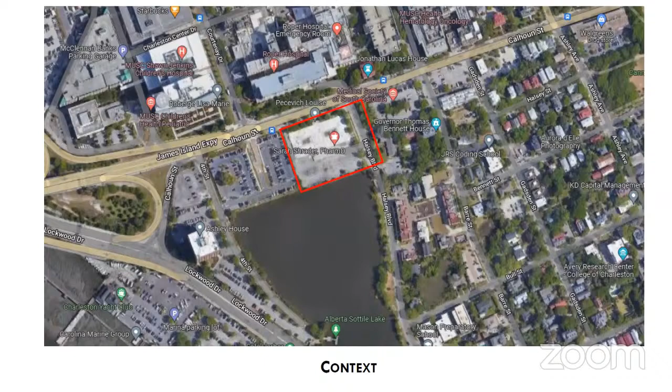Thank you, Mr. Chair. So 295 Calhoun Street is requesting conceptual approval for new construction of a mixed-use development and requesting one additional story based on architectural merit and context. The Harleston Village neighborhood is in the Heights District 7 and the Old City District. Here are context slides for you; this site is between Alberta Sottile Lake and Calhoun Street.

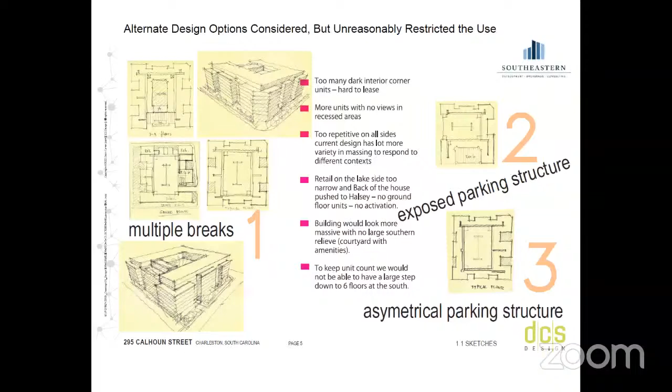So let's look at the building. It's roughly the same in terms of the basic massing. What can we do with it? How can we bring the scale down? Most of the time, when we look at Calhoun, you have Roper Hospital, a children's hospital, and they have much taller, bigger buildings. There's no real reason to bring this building down.

But we did feel that from Harleston Village and from the south side, the building needed to do something. We felt that if we created steps in the building, it would do two things: bring the scale down on the south side, and also break up the long facades along east and west, toward the houses and the park we're creating. So we immediately felt it was the right response.

There was one thing we did — we massed out about 20,000 square feet of the best units this building had, by far the best units you could have, with southern orientation and the best views. I showed it to my client, and there was hesitation, but after a while I said, this makes a big difference, usually, but let's do it. I gave the number for the loss, and we said, let's do it.

Then we said, okay, since the building is asking for an extra floor, can we do something about it? We heard from staff again, asking what if you step the building back 8 feet along the east, west, and north. So we started playing with our model again, and when you look at the building at ground level — which I'll show you later — you really can't see it from these views.

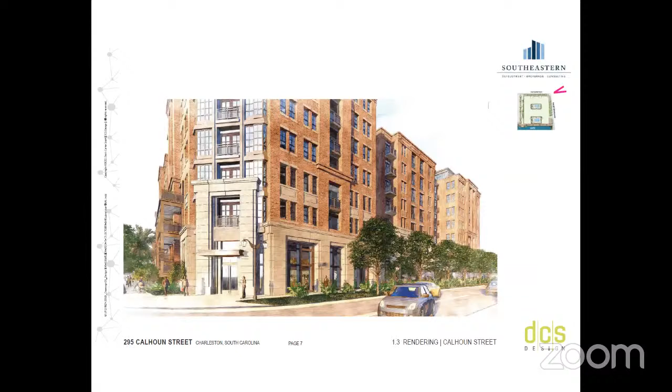So I think these were the main changes, and here's another one we'll show in the next slide. What we did on Calhoun Street, there was another panel at these meetings asking: can we read the building as three buildings, three facades on Calhoun Street? Can we create deeper recesses and start to read the building like three buildings rather than one long facade? So that's what we did.

We did not eliminate units completely, but we eliminated half the size to create these two areas, cutting about 20 to 25 feet deep into the building. So it really starts reading like three separate facades.

And from this view, you start to see this as a 7-story building. You see a little bit of the 8th floor, but that's it. This really starts to feel like a much shorter building. And because it's done in concrete, this building doesn't have to be as tall, since the floor heights are less when you do a concrete building, as we mentioned last time.

We want to build a really good quality concrete building that lasts a long time. We didn't want to do wood frame, and we can go much faster.

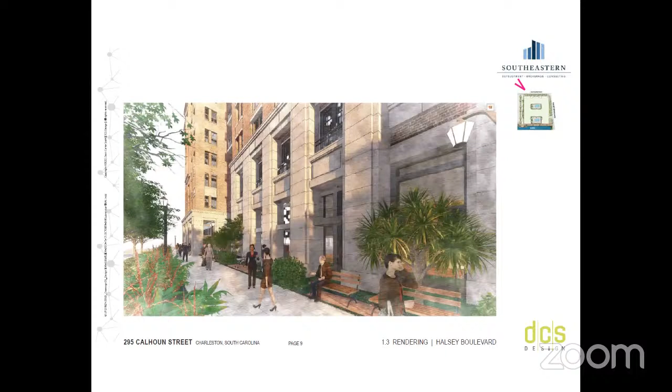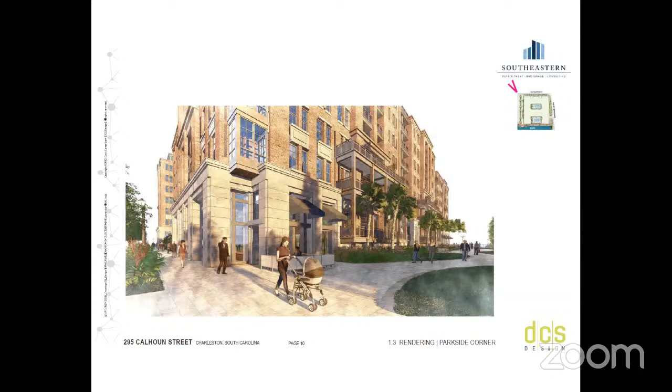This is going through the building, and again we repeat basically the same articulation, some elements with the balconies on the side of the park. Again, reading it, it's really a 7-story building, because the 8th floor is set back so far.

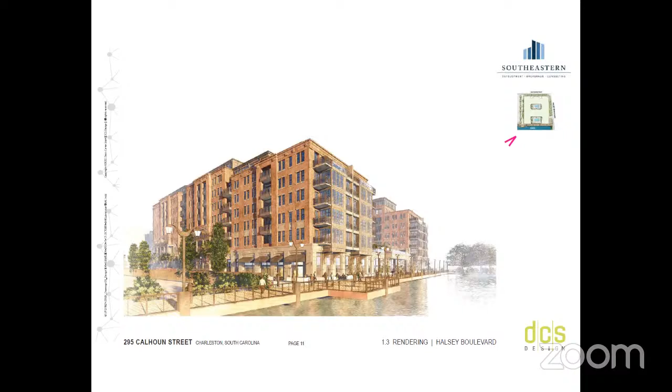Now you start to see the effect of the stepping of this building. If you look at it, it starts with a volume that's just 5 stories here, then about 10 feet back it goes to 6 floors, further back it goes to 8 floors. You see how much volume was taken off the building and how much it reduced the scale a little.

But it's also starting to read as separate volumes here, and I think that was the real goal - because everybody liked what was happening in the south with the deep recess, deep courtyard, repeated in some form on the north side, though not at the same scale, and then doing something really distinct with the east and west facades. I thought it was pretty successful.

These are just some other views, so you can see again the scale and stepping of the building. These are repeated views a little bit. One more, please.

This is the same, starting at the sidewalk on the Halsey side, on the other side from what you'd see on the building. You really can't see the 8th floor. There's a little bit of stepping, going from 5 to 6, then to 8 here, but really it reads as 7 visually because the 8th floor is so far back.

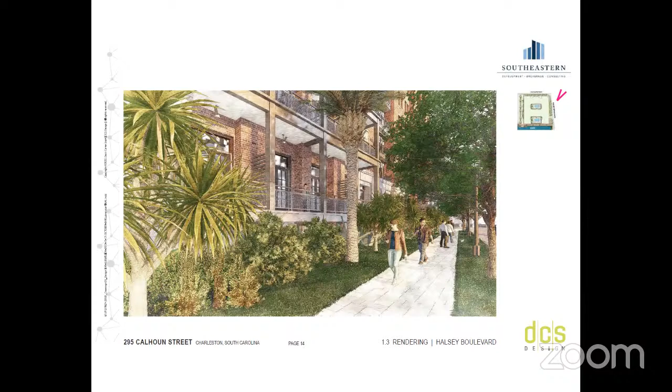This is just to show that we wanted to address each side of this building in a different way. Halsey is really a residential street, so when you're walking by these 3-story balconies, now broken up, there's no long elevation - they really create this feel of a 3-story volume that you walk by, which is almost the height of the townhouse.

So when you feel that, the nice thing is the activation, because you can have people sitting here having a coffee, say hello, and it just feels safer that way. So that's why it was so important for us to maintain these units and home activation on this floor. These are just really important to give you a feel.

And I would like to finish my presentation. Thank you.

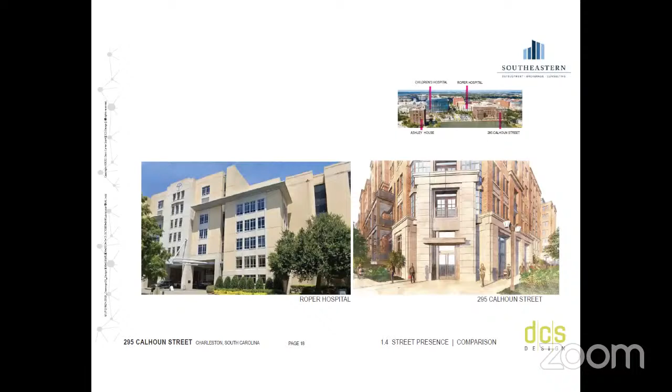Mr. Chairman, before we do that, can we go back? I have a couple of questions for Mr. Menders. Of course, that's entirely appropriate, questions of the applicant. Yes, okay.

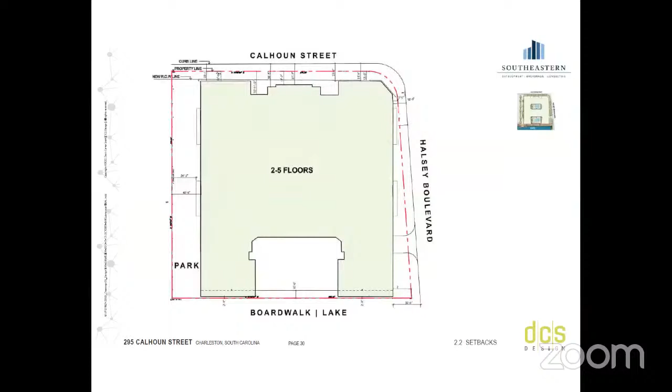Lawrence, if you go to page 33. So I wanted to just confirm with you: the first floor setback is 10 feet on the south side. Yes.

Immediately, the living floors immediately above, it looks like it's about 2 feet. Is that right? There's an overhang of those immediate floors. The overhang is roughly, it's about probably 17 to 18 feet. So let me just look at that with you. Sure. So I've just had knee surgery. That's okay, yeah, we can have that screen. This overhang is about 17 to 18 feet. So this is the top. Yeah, that's correct. I thought you meant height.

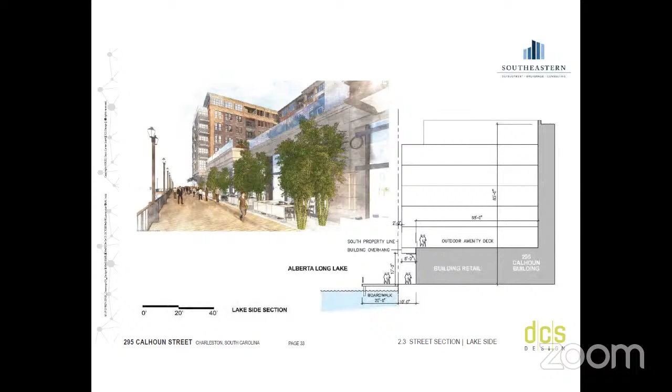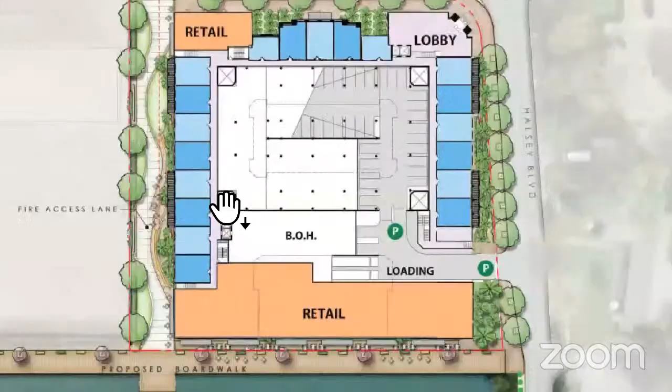Lawrence, page 29. Just looking for confirmation on this: is this west alley, on page 30 it's called a park, on 29 it's called the fire truck vehicle access? So the west alley, well, it is a park, but it will be designed as a park. It's going to have the paving and the green area, but in case of fire, it can be a small section of it, about 120 feet into the bound, that can potentially be accessed. We don't know yet whether we need that, it was not finalized, but it can potentially be used. It will be designed as a green space with benches or something that would protect it from the fire truck going in, but you would never tell that it's a fire access. Right, I was just interested in that. Yeah, it was called out as two. Yeah, it's still not certain whether we actually need it because this is now a high-rise concrete building and doesn't need that much access because of how it's designed. All the fire protection is inside the building compared to a low-rise building. Because this is a high-rise building, I don't think we would need that, but we did put it in just in case. Thank you.

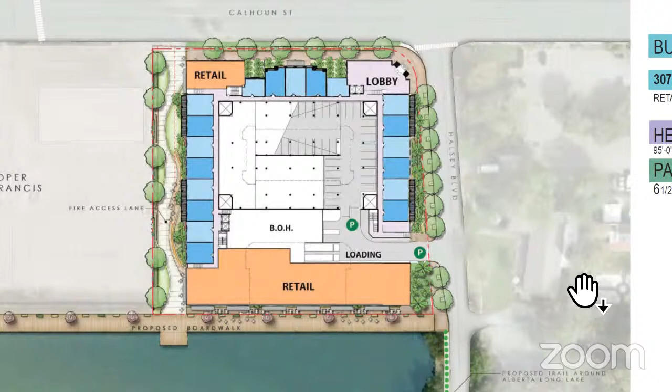And just a question in general: the HVAC equipment, I don't anticipate that it'd be drawn now, but do you anticipate that it would be on the roof? Yes. Do you anticipate that it would be visible if we were to look at some of the elevations? We did have an exhibit with a roof plan of the building. We set it back about 20 feet away from the edge of the building, and it depends what kind of equipment. Usually these units are between 4 to 5 feet tall, but we haven't finalized the mechanical system. You expect it to be about 4 to 5 feet with some screen walls, and potentially some overruns for elevators and things which are also tall. But there would be setbacks significantly, like probably 4 to 1 or 5 to 1 from the edge of the building, so there's no way to see them unless you are 500 feet away. Thank you.

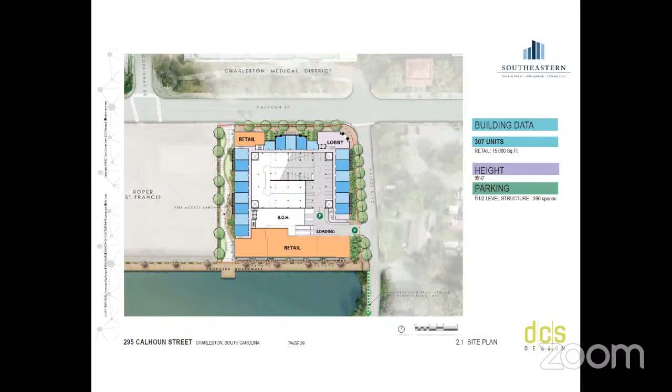Ms. Wheeler: Yes, I have some questions as well. If you could go to page 13. I studied the floor plans and the perspectives, and there seems to be some disconnect, so I want to get some clarification.

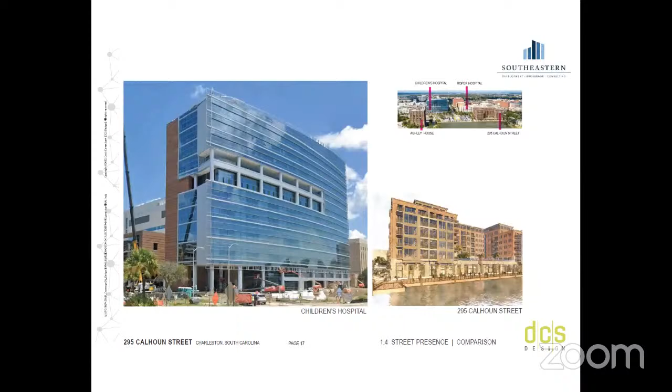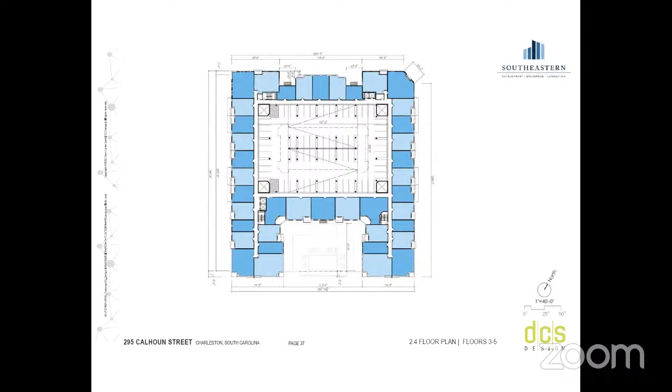Okay, then I found another disconnect, which is concerning the eighth floor recess. So if you go to page 11, 12 - and I know you studied the recess based on staff comments extensively - I'm looking at this 8th floor recess here, right?

This is the 8th floor. Can't see it from this perspective here very much, but I can see it here, and this is kind of in line with the balcony here. Yeah, so it's a significant setback. Oh yeah, it is, but probably about 30 feet - significant, but it is a setback from the 6th story.

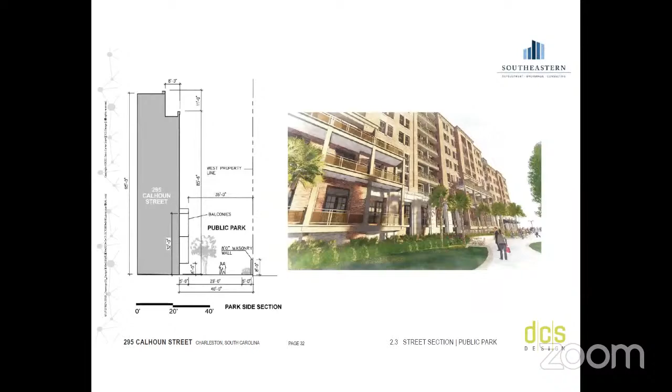But then when you go to the floor plan, which is again page 39, that 8th floor is much further pushed out, so it looks like it's 13 or 14 feet further pushed out from what I measured from the drawings. So this one here is not aligned with the balcony that was on the floor below.

Oh, so which then - this is pretty far set back. It's not what the rendering shows, though. Well, it's within a foot or two probably. I mean, it's not more than that.

So have you developed the floor plan separately from the rendering? Yeah, these are right now conceptual floor plans. We did not - this is not like a model that is 100% connected. I think that model more or less matches exactly what's shown in this plan. And if it doesn't, we can happily follow the 3D model. But I think those are pretty much a very close match to each other.

Yeah, I don't think it does, but I'm just confused - which drawings should we look at when we review this, or when we judge this presentation? Should we look at the renderings or the floor plans? We actually have also submitted the floor plans that have the exact dimensions. Yeah, I have them here in front of me, and again, it doesn't align with the renderings.

And the renderings are what we look at to judge the massing mostly. Yeah, the renderings are pretty accurate. I mean, these are not 100% exact models - these are conceptual models, but they are within a foot or two of all of them. Except I agree that probably the balcony in one floor was showing slightly less than on the other. I agree with that.

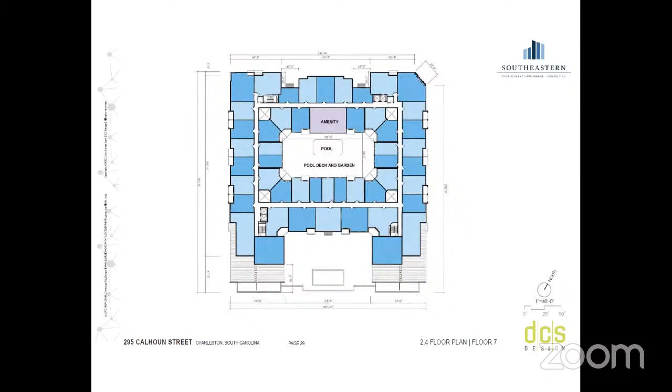But thank you. Any further questions from the board before we move to city staff comments or recommendations? I'm going to make an observation.

While there are some similarities in materials and perhaps even in the general perception of overall massing, staff has worked extensively with the applicant to adjust materials and modulate the massing to an 8-story form along Calhoun Street, transitioning down to 6-story massing and lower forms along Alberta Sottile Lake and the edge across the village, while additionally breaking up the massing vertically with hyphens and other design elements. While still a large building, which is not inappropriate to the context of the medical district, its massing has been adjusted with treatment vertically and horizontally.

We have three comments. Number one, at the east and west elevations, reduce the length of the units closer to the exterior at the 7th floor at the south, which have been extended. The length of these as proposed weakens the transition and diminishes the articulation as a step between the 6 and 8-story portions. This is evident on page 13, if needed for reference.

Two, as the massing on Calhoun Street, with the exception of the chamfered corner, is symmetrical, consider adjusting the eastern third of the Calhoun facade so as to make the openings mirror the western third. The chamfered corner should be what breaks the symmetry instead of a change in the pattern. And three, continue study of the top of the 7th floor at the chamfered corner, because this is the entry to the lobby of the building, and it is the element that breaks the overall symmetry of the massing. Consider how it might deserve some additional hierarchy.

Staff's recommendation: with the achievement of staff comment number 1, the development team will have completed required revisions set forth in July 2021 to achieve staff support of conceptual approval. Therefore, staff recommends conceptual approval with staff and board comments.

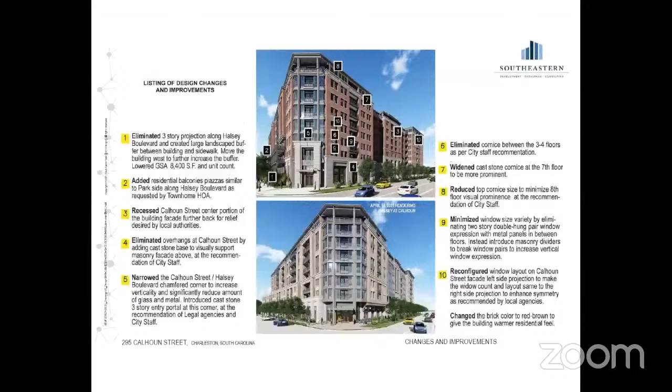So at the top of the cast stone cornice, the base of the window above dissects the cornice, and this breaks the continuity of the cast stone. The area I'm talking about, that interrupts a run for me as I see it, is here.

When I look at the precedent images used in the presentation, some of which are adjacent to the structure and some are not, I see some of the finest architecture in the city. And I struggle to make the transition from the precedent buildings and the details that have been identified and the proposed plan. Those are my comments. Thank you, Mr. Measures.

Further board comment on this agenda item? I have one question regarding staff comment number 1. Can you explain what you mean by that—that the units have been extended versus what was discussed at one point—just to understand what your condition really is.

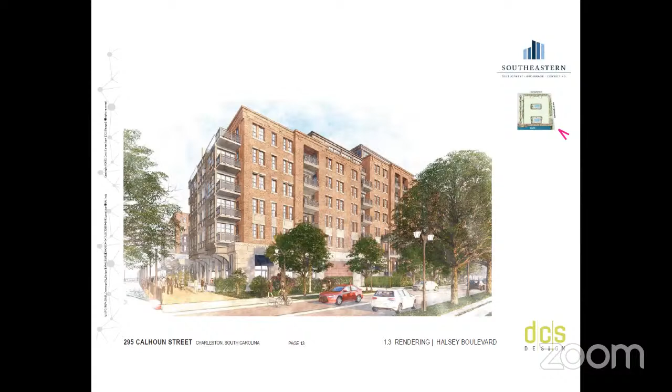See it from here, you picked some angles relatively close to the building where you don't see the eighth floor that much, but if you go back to page 13, a little bit further away, you do see the eighth floor now. You don't have the benefit with this building to be downtown, surrounded by a lot of buildings. You have the view that is a benefit for you, in terms of the lake, but when you walk around the lake, you will see the eighth floor completely. So I think it needs to be pushed back further.

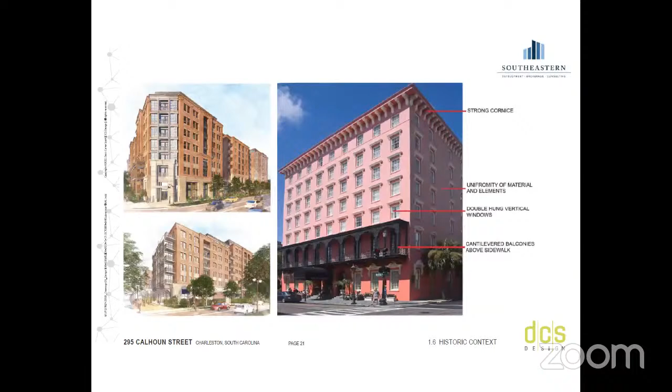Also, if you look at coming from Calhoun Street, I think it's page 25, you'll see that from that elevation you completely see the eighth floor. This is the end of the building, and this is where the eighth floor is. So we have a lot of vistas around this property, and this needs to be addressed appropriately, I think.

Now, any other, in terms of scale, I think you did a lot to the building. The east and west elevation has a much better composition. Basically, what you described—you cleaned up those 2 and 3 story projecting balconies—that I actually think will work. Architectural language, that was the general architectural direction that you were supposed to restudy. I see a couple of positives there compared to the initial presentation. You simplified that brick corners. You eliminated some of the decorative cast stone bands that were just too elaborate and did not need to be there. So I think generally the simplification has happened and was positive.

The stone base has been cleaned up a little bit, but I still see, you're asking for architectural merit, an interruption here. You have a stone base and then it's interrupted, stone base interrupted here.

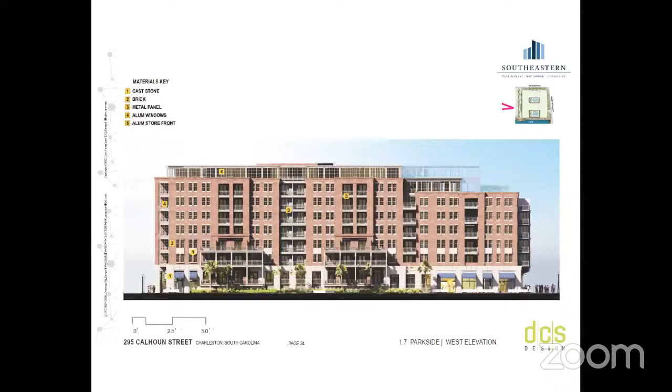That has been studied and is better, but there are elements here where the corner again is dying into a mullion of a window. These are details that are not in harmony with the surrounding buildings. That's not something you would see anywhere in Charleston, and it's discomforting.

If you wouldn't ask for the architectural merit, we wouldn't really look at these details yet. But if we need to consider giving you an extra story, we need to look at the details and see if it's an exemplary design. These details need to be cleaned up and need to be in harmony with the prevailing character of Charleston.

So I do see a lot of positives, but I think it's not quite there. I think the massing is almost there, but the eighth floor needs to be pushed back further. And the architectural direction needs some of those very concerning details cleaned up.

And then I do have an issue with voting on a submittal where the floor plans do not match the elevations. These are binding documents, so we would...

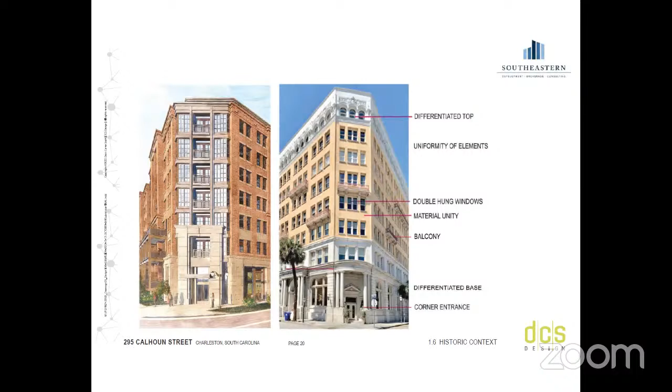As many have reminded us earlier, the charge of this board is to consider, among other things, the general design, character, and appropriateness of the design, the height, the scale, and the mass of the structure, and its relation to such aspects and features of its immediate surroundings. After listening to today's presentation, reviewing the site plans and renderings of the project, and further considering the public input recorded both electronically and in person, I find that this project has not met the appropriate threshold to be considered for conceptual approval.

Item 3 of the Charleston vision, developed from the 2008 Charleston Preservation Plan, states that Charleston will look like Charleston, with recognition that the city's eras of development each have a distinct and valuable character, which collectively represent the continuity of the city's rich history.

This property serves as a gateway to the city. It can be home to a structure that is a neighbor to Harleston Village, an enrichment to its natural surroundings, and a grand example of the general character of Charleston. In short, it can be authentically Charleston, respecting the Charleston of yesterday, complementary to the Charleston of today, and of a quality to be appreciated by the Charleston of tomorrow.

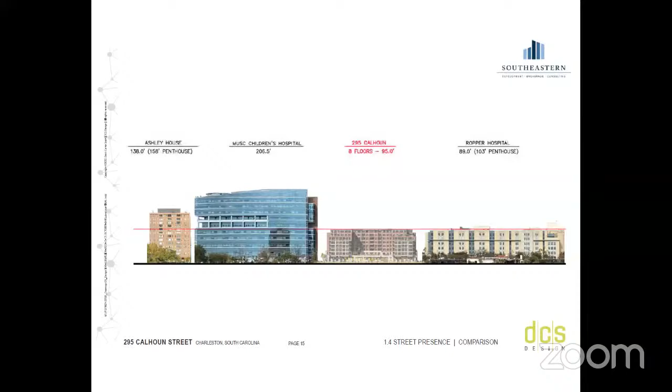I think architecturally, we need to decide if that project meets the standards. And I think for the public realm improvements, I definitely check those boxes. You check those boxes.

Exemplary design, it improved a lot, but those details we pointed out, are we comfortable those will be addressed in the next round, or do we need to see this change? Do we need to see the 8th floor pushed back further and the 7th floor pushed back further, the way city staff recommended in their letter from July last year?

In which the applicant says they have renderings showing that further pushback, or at least that was my understanding, from those comments we received on Friday. So I have actually shared...

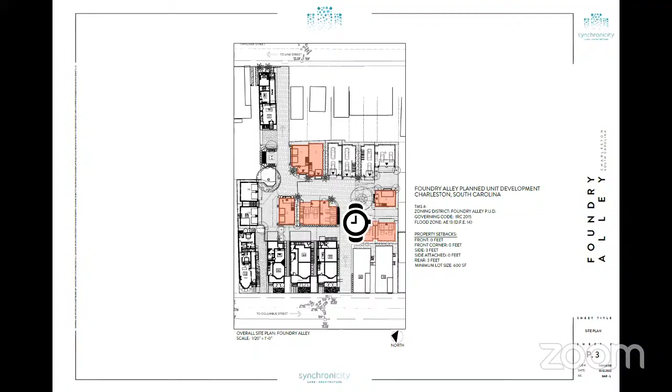Second, I would also say we are very lucky in the City of Charleston to have livability court, and the livability court protects the rights of all of us that live here in Charleston. It allows us some ability to assert quality controls over our neighbors. If somebody is not maintaining their house or property in a way that's safe or good, we have a voice as Charlestonians. Not a lot of places have this. So long term, maintenance in Charleston, there's a route to where that can be addressed.

So we feel that this material substitution request is really for this very specific parcel, which is all new construction, which is all a very good distance from any public right of way. We have to look a long way. We have a graphic late in the presentation. If you could just kick it forward to that, please.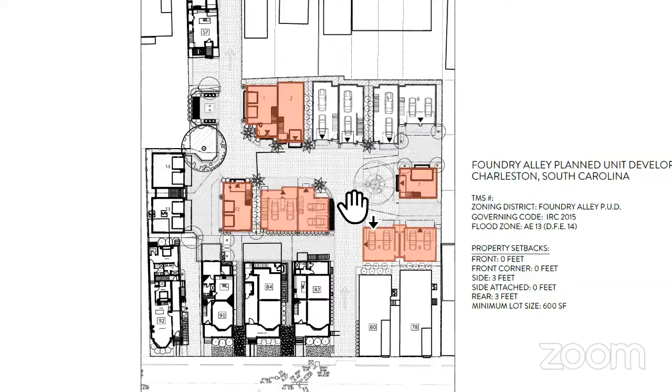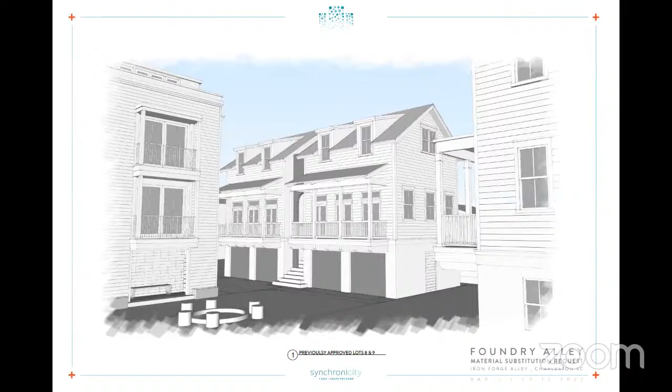Got to put overhead X on it. It's a duplicate of the one on the first page. I believe it's the last slide. There we go. So this is a really good slide to look at.

There's not a place where you can be, anywhere, where you're more than a full building away from any of these structures that are going up. The visibility will be minimal.

I've spent a lot of time here on Nassau Street looking into the development, because this is 3, 4, 5, and 6. These are the ones that are clad. They look great. But I would really be surprised if I was able to determine that the cladding thickness varied by fractions of an inch. I don't think that a material substitution will compromise visually the integrity and quality of the design.

I've already mentioned fiber cement is an approved material. The performance, the way that it holds paint, the way that it holds up, the city's okay with this. It's already been approved and is approved. So it's not the fact that it's going to look less good. Really what we're talking about, I think, is the main difference between the 5/16 and the 5/8 will be that we're not going to get the same shadow lines from the clad cladding.

From the last board meeting, we went back and we tried to find any other alternative that we could have, so that we don't want to come here and take up the board's time. The client definitely doesn't want buildings to sit out there any longer than they need to be, but we looked at anything else that we might be able to use, and unfortunately there's not really an appropriate substitute material. These buildings are narrow. We designed them to be narrow with a lot of fenestration. They have a nice rhythm, and they're not suitable for a vertical oriented board. I don't think a board and batten would be really the right look out here.

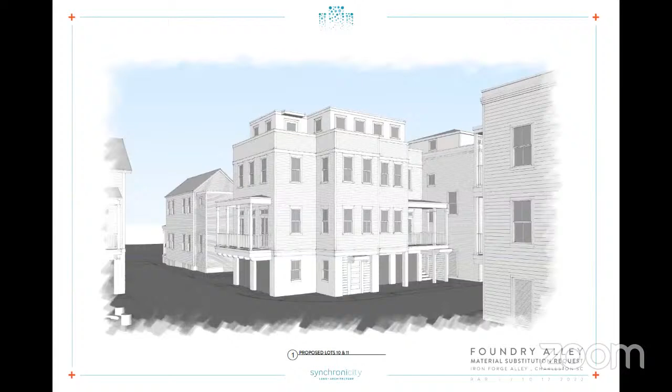What we'd like to do, we feel - and we have a slide maybe two back - is change the exposure of our lap siding; 6 inches is what we had. These aren't ideal graphics, but they give a sense. It was sort of supposed to be a compare-contrast.

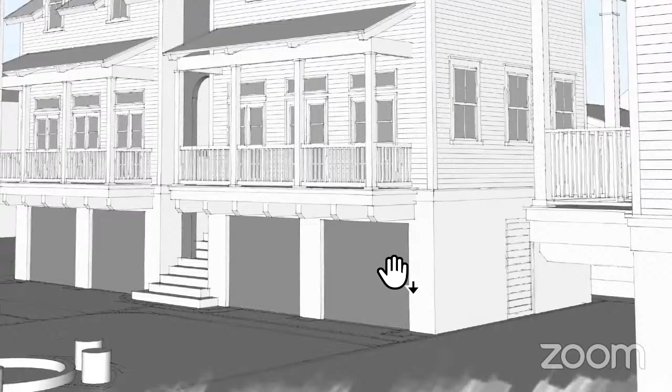So 6 inches is approved. Let's say that gives us X amount of 5/8 inch thick shadow lines along the exteriors of these buildings. If we reduce our profile to 4 inches and use 5/16 inch cladding...

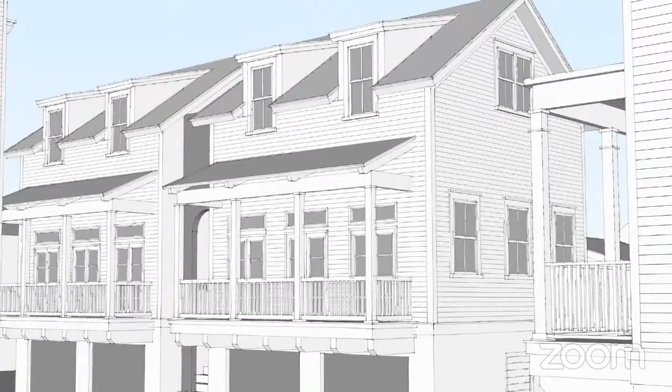We will not have the same depth of shadow, which is pretty slim, but we will have a more pronounced shadow, and we think that character will help make this material perform visually better from the distances where it will be used in the right of way.

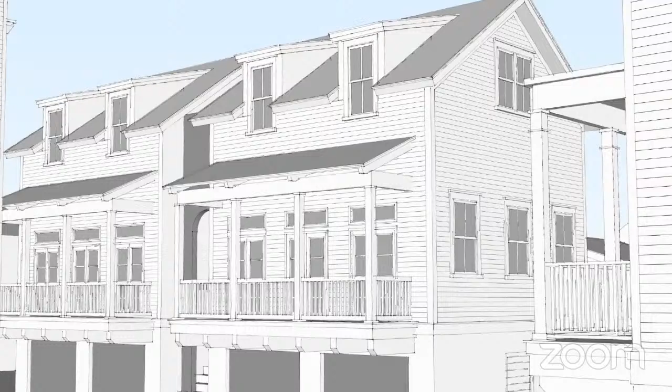Also, with the 4 inch exposure, there's less likelihood of the material being asked to do something tricky. With a 4 inch exposure, the boards are stacked tightly, so there's not as much opportunity for things to warp.

Again, even if they did do that, the City of Charleston would be reviewing this construction, and whether it's 5/8, 5/16 or anything else, if it's not installed correctly and well, it won't be approved.

So I would ask that to be considered. Also, one other final point: we don't have a lot of long runs on any of these buildings. The majority are duplexes, so the long sides touch.

So that's one long side that's not visible. The other long sides we have are relatively close to the neighbors. This is the PUD, so we don't have the normal Charleston offset.

So the longer sides of these buildings, the ones with a little less fenestration and movement, are baffled against each other and sit behind these other buildings, so it's really not going to visually come into play.

We can bounce back to the three-dimensional overall.

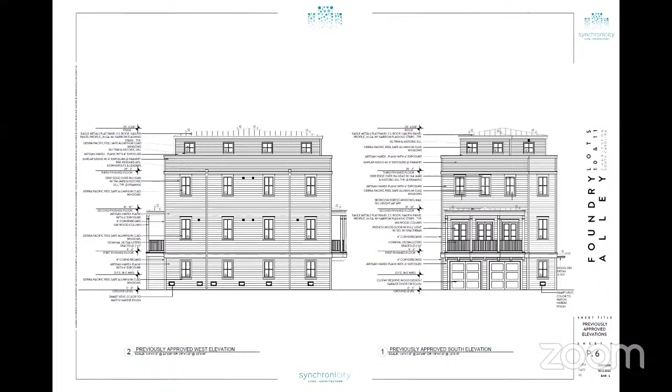It's a little tricky to see, but you can see how we've articulated the design so that all the view corridors into the site have architectural elements and features on the buildings that will be visible through there. There's a lot of movement in these buildings.

Where the prime visibility is, you will see some of these across the rooftops, not very much. They step back and have good shadow overhangs.

We've got windows, what I'm trying to say is we've got interesting buildings with a lot of depth in there.

But I don't think we're going to find ourselves in a situation here where the cladding change, allowing us to use the material we can get, will be to the detriment of the development and the quality of the work.

I genuinely do - I wouldn't be here asking for this otherwise. This is a very important development, and we're very proud of it as well. In terms of sacrificing quality for material, I wouldn't do it.

Our client has demonstrated that if there's any possibility they could get their hands on the proper material, they would put it up. We can't get it. So we're here this evening to be allowed to use a 5/16 inch fiber cement cladding at a 4 inch profile, which is the narrowest we can get.

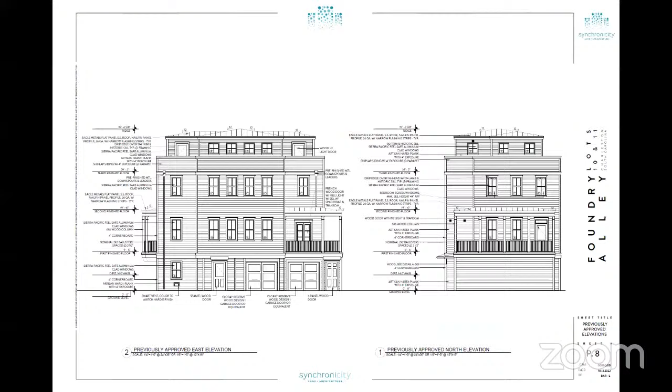Staff has spoken at length with the applicant regarding staff's and board's previous concerns and the resubmittal of a 5/16 inch product. The applicant has indicated the team may be able to obtain the Boral 5/8 inch shiplap siding for all but one of the remaining structures, but this would need to be verified, and Mr. Jarrett has addressed some of that in his presentation.

The applicant maintains that he has exhausted all options, and that these structures have reached the stage where they need to be dried in.

Reminds us that this is affordable housing, which may no longer continue to be if current conditions continue. The applicant is steadfast and passionate about the 5/16 inch siding, believing it is an appropriate product, especially given the minimal visibility, and that the board's desire for exploration of a different profile has been satisfied. Staff recommendation: while sympathetic to the applicant's plight, the board has clearly expressed the 5/16 inch material to be inappropriate and inferior, and therefore staff recommends denial.

Thank you, Ms. Parrish. Any response, Mr. Chair? Yes, please. I would like to. I understand your position. Thank you very much for working. It's a tough place to be.

But the Board of Architectural Review is not a precedent-based board. There's not a prohibition on the use of this type of cladding downtown. There are materials that we do not use, we're not allowed to use—it's clearly delineated as not being allowed. And this material has been used successfully all over downtown. Some of my very favorite buildings downtown have this on them. The ones we used in our initial case study at the corner of Bogard and Rutledge by John Douglas Tucker—there are three houses, adorable, very similar to what we've got here. They're beautifully maintained and look fantastic.

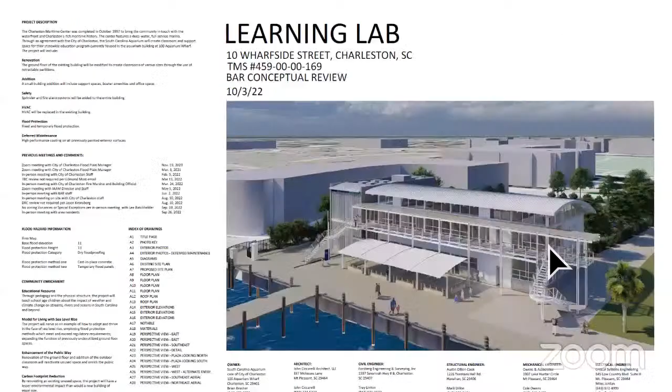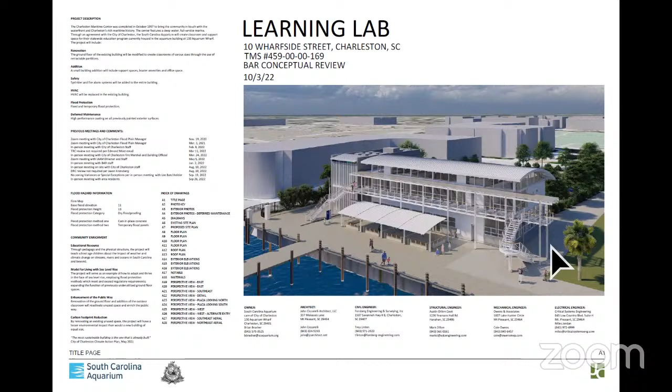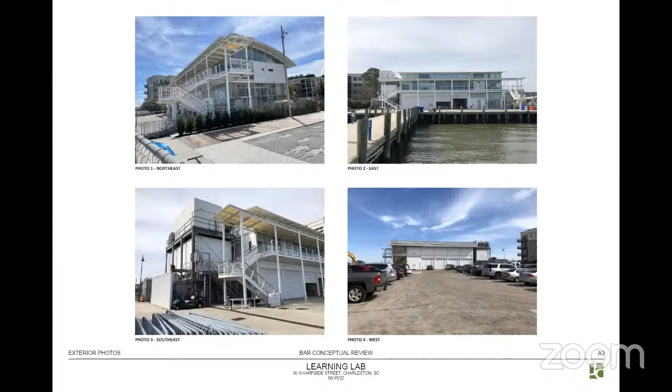Through an agreement with the city, we plan to renovate the lower portion of this building, the very underutilized lower portion, and create a small addition. As you can see, we've got some existing context. This is the view you would see approaching from the aquarium, the water side, the beautiful ice machine, and the parking lot view. Next one, please.

As part of this project, we want to run through some of the things we want to achieve in terms of community enrichment. We would like this to be an educational resource, not just for the typical pedagogy you see in classroom space, but for the building as well. We'd like the building to teach, and we'll get into that a little later.

We want it to be a model for sea level rise. The building currently is not compliant with FEMA rules for having habitable space on the ground floor. We intend to address that. We also want to enhance the public way.

Currently, the lower floor has coiling overhead doors, and not much happens there except for the ticket area in this portion of the building. We would like to activate the lower space. And for carbon footprint reduction, just by reusing an existing building, we think that's far superior to building new.

The scope of the project includes a few primary things: renovation of the ground floor, the small addition you'll see in a minute, adding a sprinkler and fire alarm system, which the building currently has none of, replacing HVAC in the existing building, flood protection, which I'll discuss in a minute, and deferred maintenance.

A lot of folks haven't seen these up-close views of the building, but it is in very rough shape. As part of this project, we're going to not just paint but add a high-performance coating system to the entire building. We'll replace windows on the ground floor and replace light fixtures throughout the building's exterior. And you may have noticed the polycarbonate panels on the upper walkway are not only yellowed and dirty, but actually broken through in some locations. That'll be part of this project.

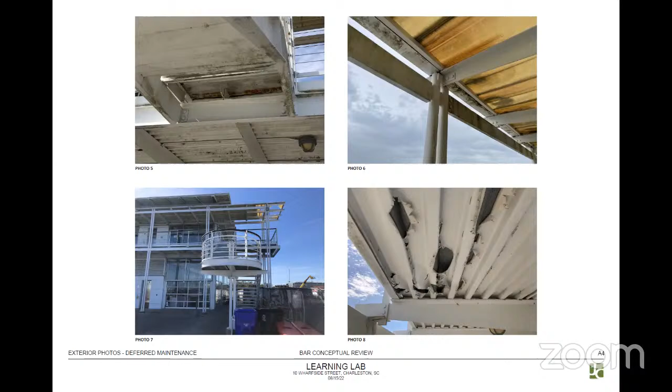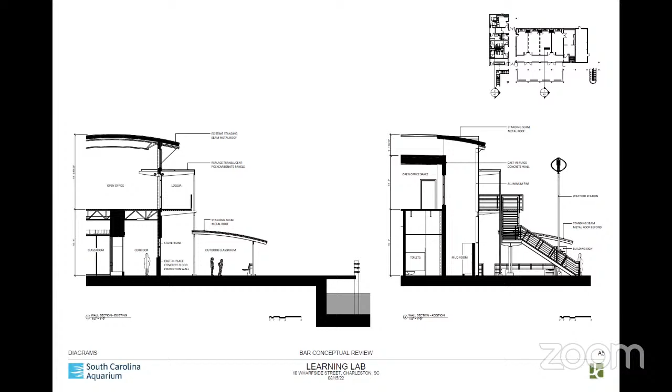Next. So the primary sections through the building—this would be through the existing building. Really the only change would be the outdoor classroom space, where we're going to mimic the existing arch roof. And on the new building, the main takeaway is that the new addition is not going to be any larger than the existing building.

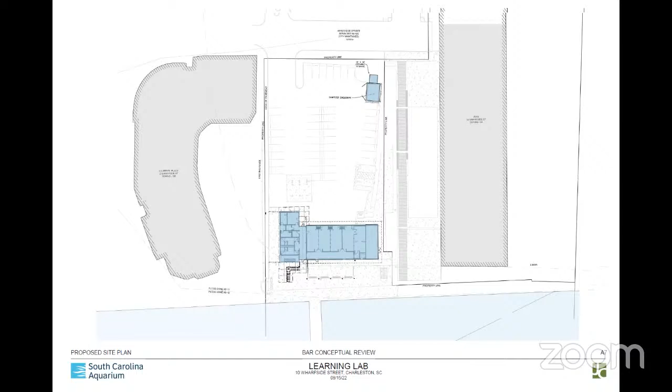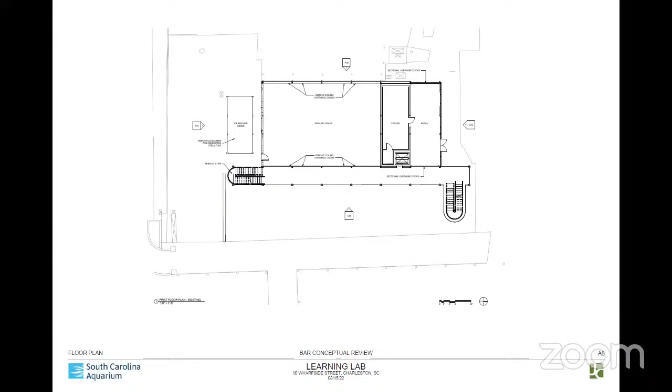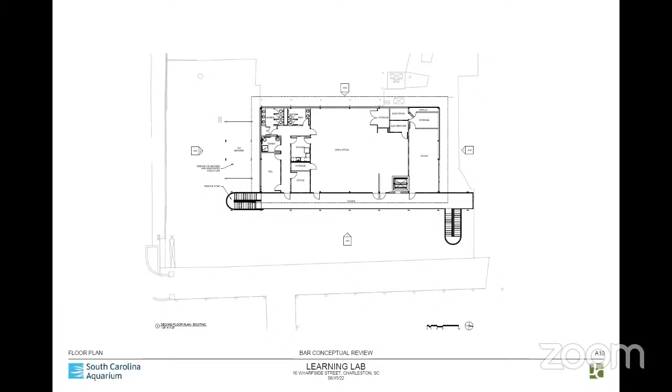Existing second floor, again, the ice machine to orient you. Currently, the second floor space is being utilized by the African American Museum offices, and it will continue to be used by them in the future. Next, you can see the removal of the ice machine and the two-story addition, and of course, the standing seam metal roof below the outdoor classroom space.

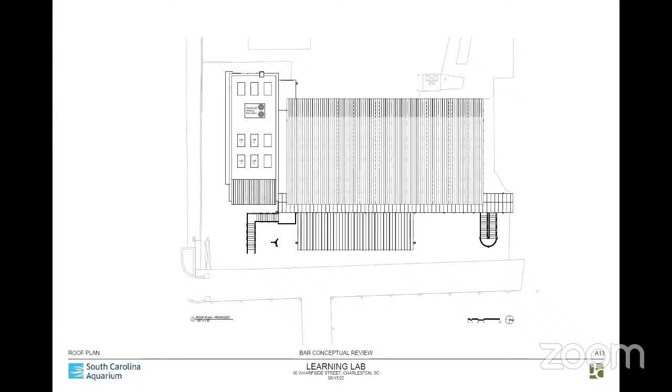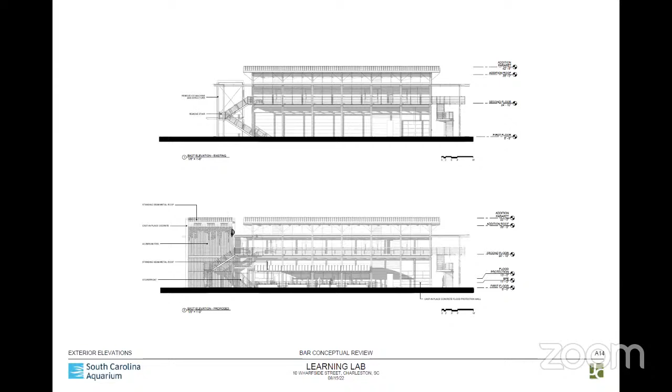So here we have the existing and the new elevations on the same page. This is the water side, or the east elevation, and everything remains pretty much the same except for the addition of the outdoor classroom covers with sunshades and the new building addition. I'll get into that a little more in a minute.

Rather than surround the entire building with temporary flood panels, which would be a nightmare to deploy, we have, to the greatest extent possible, included a permanent cast-in-place concrete wall. That greatly reduces the number of temporary panels that have to be deployed during an event. You can see it largely here where the overhead doors will be replaced with a wall that is 2-foot freeboard above BFE, and that will come around into the retail space as well. Of course, the new building will not require it because it's all cast-in-place concrete, and it will inherently have that feature.

So you just do your doors? You just do the doors. Yeah, that was the goal.

I've witnessed some of those attempts to deploy these things, and the guy who has to pull the trigger and say go ahead and put them up, it's a tough decision. So we didn't want to put more of a burden on the aquarium than necessary.

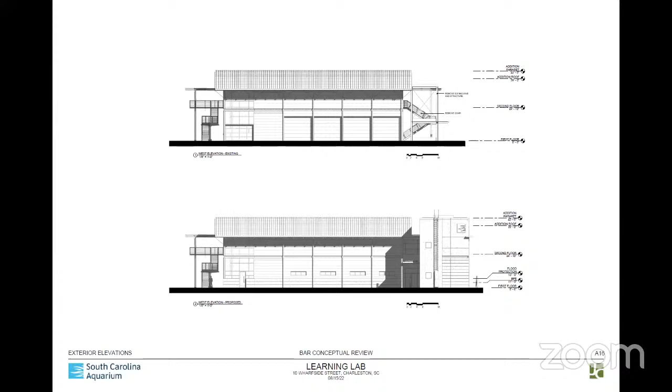So, like I said early on, we really wanted the building to not only teach from the classroom, we want the building itself to teach, and we want to get into some of that here. Taking some things that I've labeled notable, we've given a one-word title to each of these things. So start up on the upper left with precedent.

We wanted the addition to stand on its own, to work with the existing building, which I'm actually very happy to be working in. The Sasaki building is very, very dear to me; I've always liked it since it's been up. We didn't want to try to match it too much, so we took the material that has precedent on the site, cast-in-place concrete. Not only does it have the precedent, but it inherently is going to make it easier to flood-proof this new addition.

Continuity - we've got some horizontal datum lines in terms of the roof, number one, which you can see we've extended and put a portion of curved roof to continue the sight line to make the addition feel more like part of the existing building. Also, halfway down, we've taken an exposed channel that's on the existing building and embedded it into this cast-in-place concrete building.

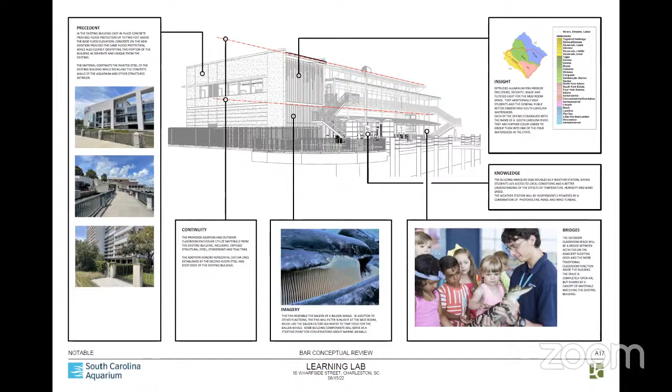So you see some of the materials, cast-in-place concrete, the aluminum fins. We're looking at a couple different approaches to aluminum fins with a white in the front to mesh it more with the white in the building.

And then on the side, we didn't talk much about this, but there is currently a grant, a federal grant that allows boaters to come down the East Coast and stop along the way at certain locations. This is one of those locations. So the plan includes a place for boaters to shower, do laundry, and use the restroom, and this would be the entrance for that.

We've tucked it around the side of the building, and we've taken the fins, taken the architectural element, and repeated it on the side, but maybe with a different treatment on the finish.

This is to just suggest how we intend to engrave the river names, standing seam metal roof, which matches the existing. And lastly, also on the outdoor classroom, this is an actual photograph from the guardrail up above. We intend to take those elements and bring them down to the ground floor because we were trying to create enclosure, but not have it look too bulky, and make it part of the building.

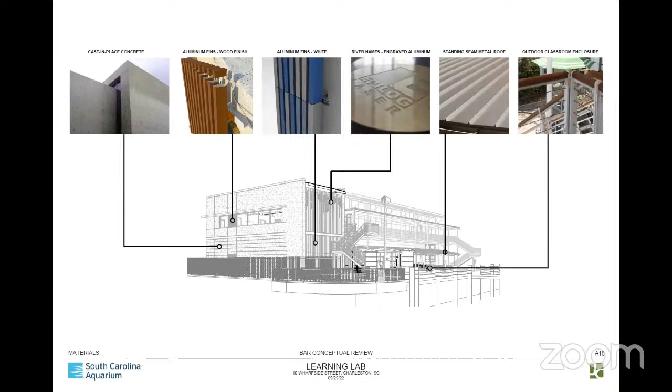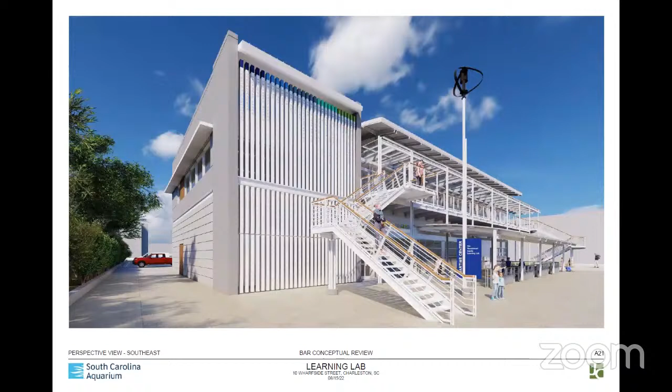This is the side view, which is currently where the ice machine is, and the passageway there is adequate to accommodate an emergency vehicle. In this case, it would be an ambulance. The city is not allowing fire trucks to go out on the water side, and there is adequate hose length, so that's covered.

That's an interesting one. That's it. That's it? No, we have a few more shots, but I'm not sure what happened. I will say they were included in the Dropbox that we got. Yeah, I actually checked and they were there. So yeah.

Sorry about that. The other images take us around the building, and I'd be happy to go over any other. I think we're set. Sure, of course. What's the matter? The fins are stationary. Yes.

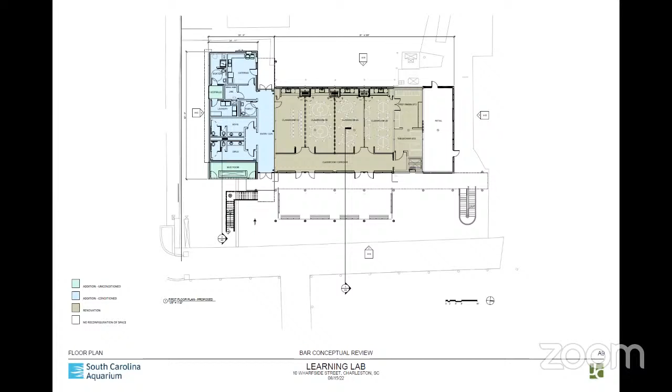I don't think we have anyone else from the public here on this one. City staff comments or recommendations? Staff comment is staff finds this renovation adaptive reuse project to be well conceived with interesting and compatible additions to the existing structure. Therefore, we are recommending conceptual approval with board and staff comments.

Thank you, Tori. Response from the applicant if they want to use it. Well chosen. Board discussion and a vote on this agenda.

I just want to say thanks to the applicant for a very clear presentation and for a very attractive and sensitive and successful addition and renovation of this project. It's very creative and very well done, and I look forward to seeing it move forward. I would echo Ms. Wheeler's comments. Good, great adaptive use. Any further board comment or a motion?

I make a motion for approval of the application. Motion for conceptual approval. There's a motion for conceptual approval from Mr. Metters. Is there a second? I'll second. Mr. Brown seconds.

Mr. Chairman, I might modify that. Sure, you may. May I ask Tori a question first? Sure. I'm comfortable with final details to staff. If I can modify my motion. That's fine, how about you restate your motion?

I'll make a motion for final approval with all details to staff. Your motion is for final approval? Okay, motion for conceptual approval with final approval left to staff. Perfect. Is that a correct restatement of your motion? Is there a second? I'll second.

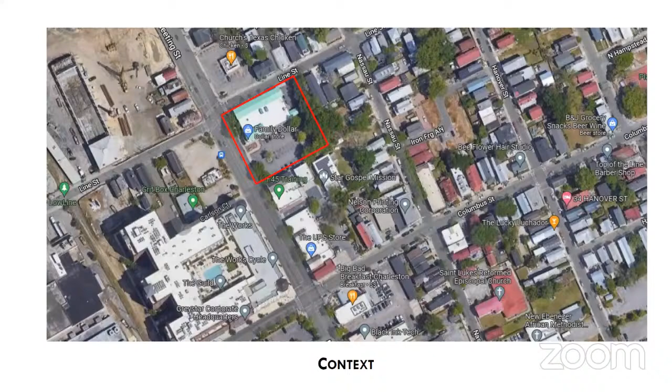This is the location of the building, and you'll see the existing signage right there. It does occur on 2 facades. This facade from Meeting Street. This is some context of what else is in the area.

Okay, we'll have the applicant. How you doing? I'm David Pinheiro with Charleston Signs. We're proposing illuminated reverse channel letters on this facade. We were asked to come to the board for your approval in regards to the illumination.

This one here is the parking lot. So we're asking that you would approve the illumination due to the fact that it was previously illuminated, and now it's going to the rebranding of the Family Dollar and the Dollar Tree, and that it is still within the 10% of the facade square footage, both on the parking lot side and the Meeting Street side.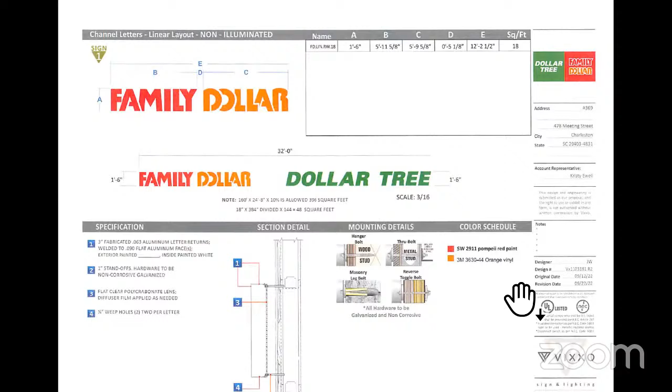So that's what we're asking for, your permission to illuminate the signs, and I guess that's about it. Thank you, Mr. Pinheiro, that's short and sweet. That's good though. Any public comment on this agenda item?

Looks like none. Ms. Parrish. Procedural: signage is to replace existing facade signage on the building which exists at the front and side of the building. While staff would not typically entertain the placement of 2 facade signs, these in a non-illuminated form may be thought of as a replacement in kind if they do not exceed the area of the existing signage. So we're recommending denial of any illuminated facade signage, and approval of proposed signage not to exceed the area of existing signage at the same locations.

Thank you, Mrs. Parrish. The applicant technically has the ability to respond, but no comment? Okay, very good, we will now move to board discussion and a vote. I do have one question - the plans continue to say non-lit letters, but they're currently lit.